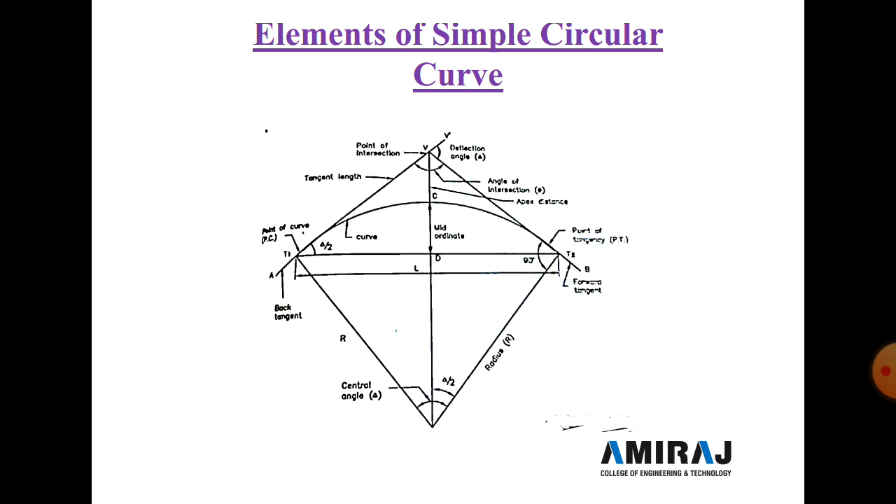Today we start a new topic in chapter number 4, curves, of the subject surveying. So today we start the topic elements of simple circular curve. In the last lecture we discussed the different components or parts and their definitions, and today we discuss the elements of simple circular curve.

So first we start with length of curve. What is length of curve? The total length starting from T1 to C to T2 is known as the length of curve. If the curve is designated by the radius, capital R, the length of the arc is equal to T1 C T2. You already saw T1 C T2 in the figure. This is the total length from the starting point of the curve to the end point of the curve.

So length is equal to R into delta, where delta is in radians. To find the length of the curve we use L is equal to R into delta, and where delta is in degrees, L is equal to R delta pi divided by 180. R delta pi divided by 180 is the total length of the curve, and these two equations we use if the curve is designated by the radius, and second if the curve is designated by the degree of curve.

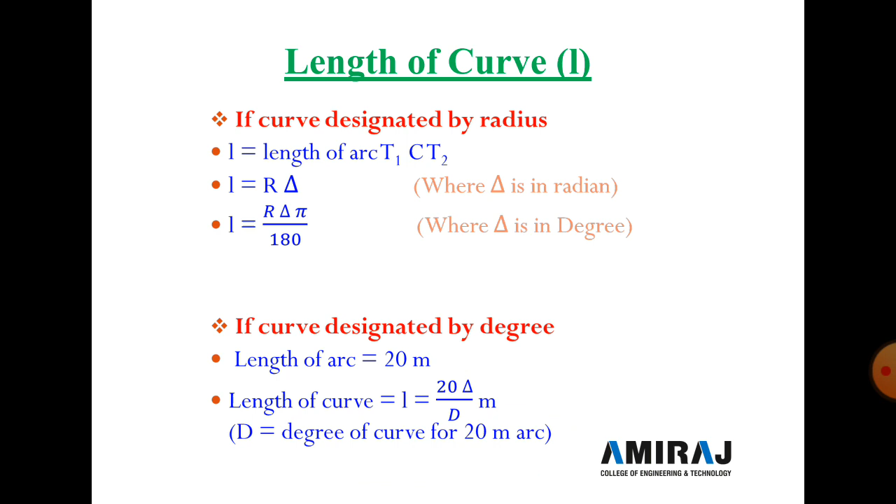Length of the arc is equal to 20 meters. So length of the curve L is equal to 20 delta divided by D, where D is the degree of curvature for a 20 meter arc. These are the final equations for finding the length of the curve.

Next is the tangent length. What is tangent length? Tangent length is the length VT1 and the length VT2. VT1 and VT2 are equal to T, so T is the tangent length. We take the triangle VT1O. Here the central angle, the total angle, is delta, so the half angle is delta by 2.

So we take triangle VT1O. Here tan delta by 2 is equal to VT1 divided by OT1. VT1 is the tangent length T, and T1O is the radius of the curve, equal to R. Clear? So T is equal to R tan delta by 2, where T is the tangent length and R is the radius.

Next, the equation for finding the length of the chord. The length of the chord is the total length from the starting point to the end point. This L is the length of the chord, L is equal to T1 to T2. In other words, 2 times T1D or T2D. Clear? To find this length we take the triangle T1DO.

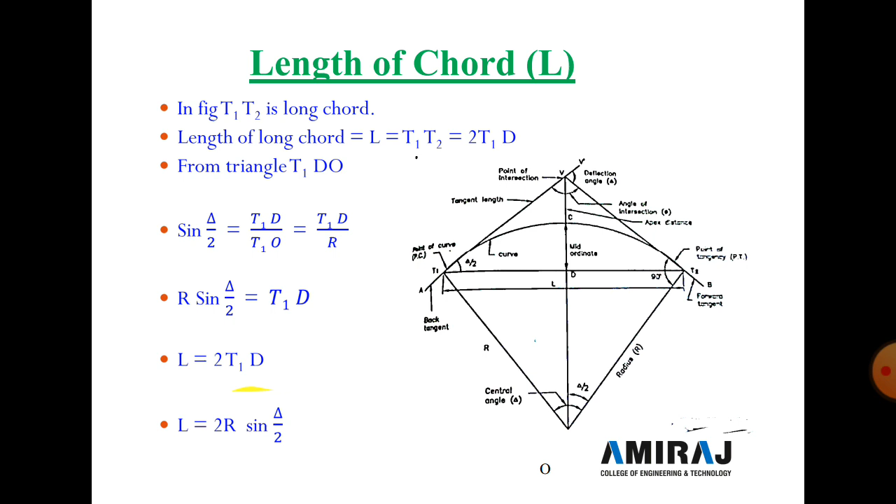Next equation: find the external distance E. The external distance is the distance VC. This distance from V to point C is the external distance. So external distance E is equal to VC, which is equal to OV minus OC.

So we take the triangle VT1O, which we discussed in the last slide. Here cos delta by 2 is equal to OT1 divided by OV. Clear? We find OV, and OT1 is already known, it is the radius R. So OV is equal to R divided by cos delta by 2, so OV is equal to R sec delta by 2.

Now E is VC, which is equal to OV minus OC. OV we found as R sec delta by 2, and OC is the value of R. OC is the radius of the curvature, because this is a curve and R is the radius of the curvature. So R sec delta by 2 minus R; R is common, so R (sec delta by 2 minus 1). This is the value of the external distance E, the equation for finding the value of E.

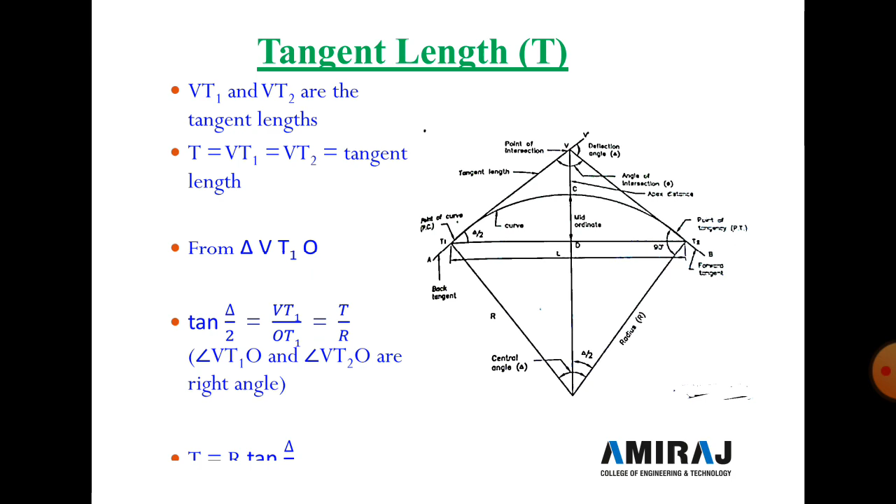in this equation. So M is equal to OC minus OD. OC is already known, the radius R, and OD we calculated as R cos delta by 2. Now in both values R is common. So R (1 minus cos delta by 2) is the mid ordinate equation.

Now another topic is setting out of a simple circular curve. First of all, the tangent points should be located on the ground very accurately, because when we select an area where curvature is required, we set up the instrument at a point where all the points are easily visible. Now, location of the tangent point. First the surveyor studies the work plan, then after knowing the offsets of certain points on both tangents, marks them on the ground.

Now both tangents AV and BV intersect at point V, known as the intersection point, as we already saw in the figure. Set up the theodolite at point V and measure the angle AVB. This angle is the angle of intersection, phi. Now the deflection angle delta is 180 degrees minus phi. So the deflection angle is 180 degrees minus the angle of intersection phi.

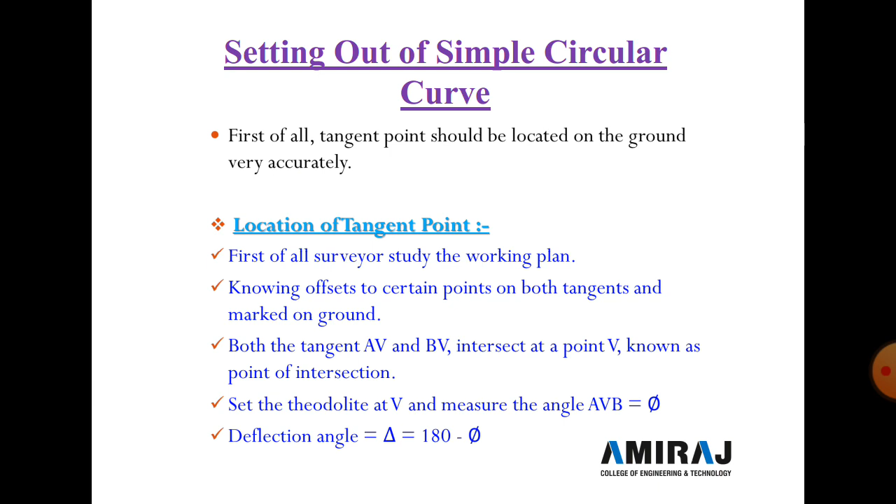Now calculate the tangent length. We already found the equation in the last slide: tangent length T is equal to R tan delta by 2. Now select point T1 on line AV at a distance T from V, and similarly select point T2 on line BV at a distance T from V. These two points, T1 and T2, are marked on the ground.

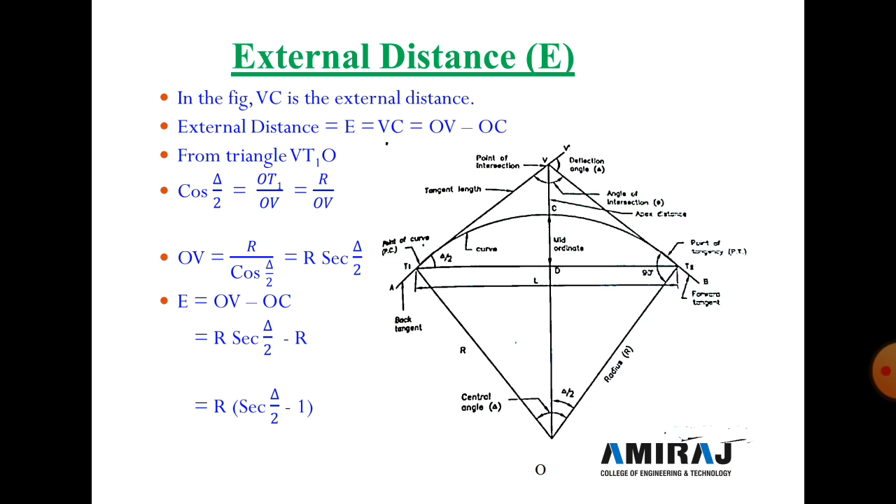Now chainage of the tangent point. The distance of any point from the beginning of the chain line is known as the chainage of that point. Point A is the starting point of the chain, and the chainages of V, B and D are measured from point A. So the starting point is A and the end point is B, and the chainages of points A, V and B are marked on the ground.

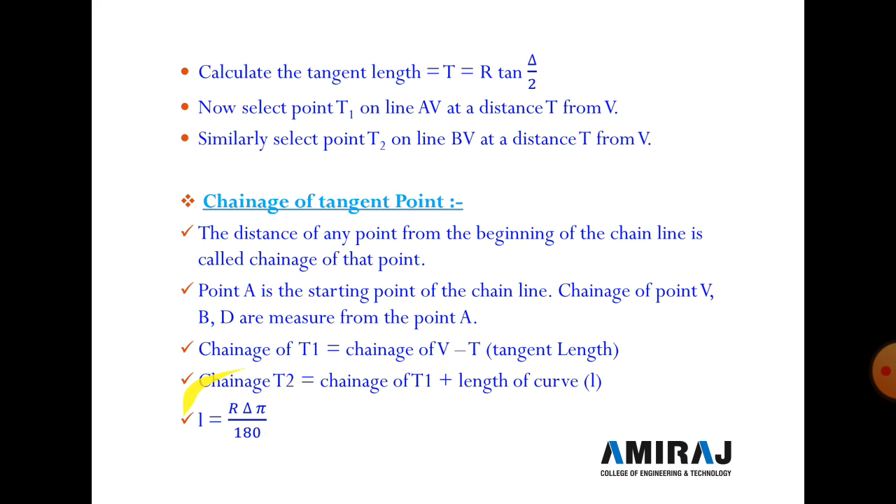Now chainage of T1 is the chainage of V minus tangent length T, and chainage of T2 is equal to chainage of T1 plus length of the curve L. Here L is equal to R delta pi divided by 180. We already found this equation in the last slide: L is equal to R delta pi by 180.

Now another topic: normal chord and subchord. On the alignment of the curve, pegs are driven into the ground at certain intervals. The distance between two pegs is normally kept equal to 20 meters, and this distance is known as the peg interval. If the pegs are driven at 20 meter intervals, the peg stations are called main peg stations. The chord joining tangent point T1 to the first main peg station is called the first subchord, and all chords joining adjacent peg stations are called full chords or normal chords.

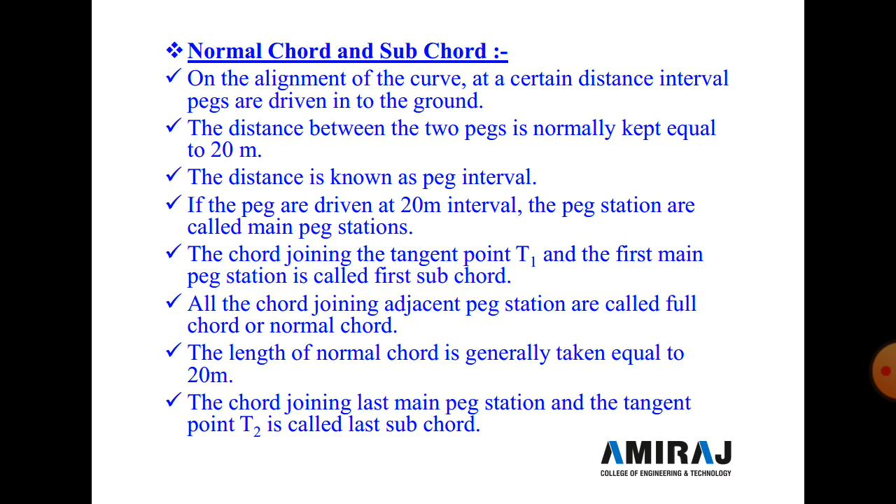So the small chord is a subchord, and the chords joining from start to end are full chords or normal chords. The length of the normal chord is generally taken equal to 20 meters, and the chord joining the last main peg station to tangent point T2 is called the last subchord.

Now next we start the methods of setting out of the simple curve. Here there are two main methods: angular method and linear method. So, methods of setting out of the simple circular curve. First we start with the linear method.

Only chain or tape is required for setting out the curve, and angle measuring instruments are not used in the linear method. Only general linear measurement instruments are used for finding out the length and also for setting out the curve. This method is used where a very high degree of accuracy is not required, because it's a simple linear method and only simple measurement is required.

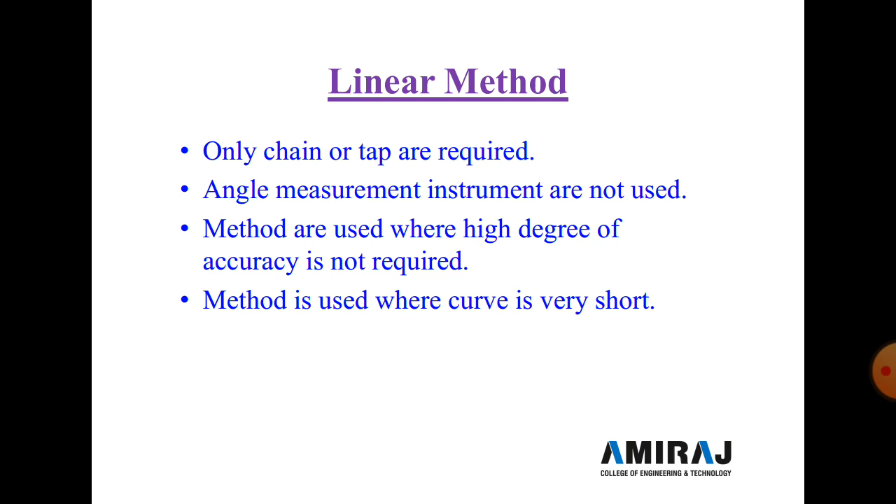So no major accuracy is required, and the method is used where the curve is not very long. The linear method is simple as compared to the angular method. There are four types of linear method: first, by offset or ordinate from the long chord; by successive bisection of arc or chord; by offset from the tangent; and by offset from the chord produced. These are the main four methods. One by one we discuss them.

We start with the first method, by offset or ordinate from the long chord. Here you see the figure. O is the center point of the curve, the starting point is T1 and the end point is T2, V is the intersecting point of the two tangent lines, T1 to T2 is the main chord, and R is the radius of the curve.

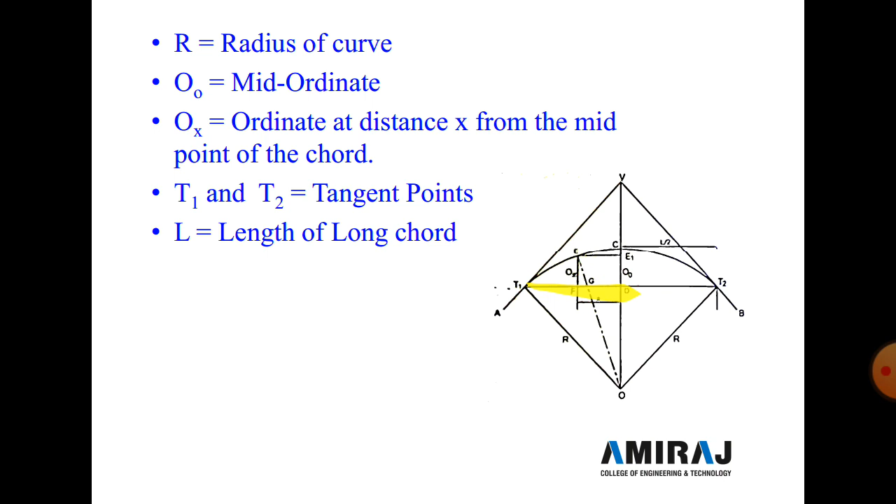R is the radius of the curve, and O0 is the mid ordinate, the distance between D and C, and Ox is the ordinate at distance x from the midpoint of the chord, and T1, T2 are the tangent points. The total length of the chord T1 to T2 is L. Now to obtain the equation for O0, we use the triangle OT1D.

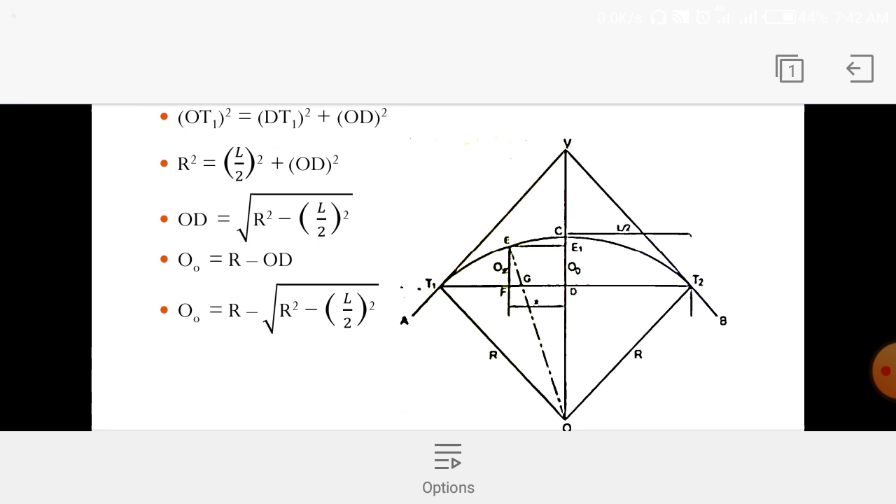So we take this triangle OT1D. We apply the formula OT1 square is equal to DT1 square plus OD square. So R square is equal to (L/2) square plus OD square. Why L/2? Because the total length of the chord T1 to T2 is L, so T1D is L/2. So OD is equal to the square root of R square minus (L/2) square.

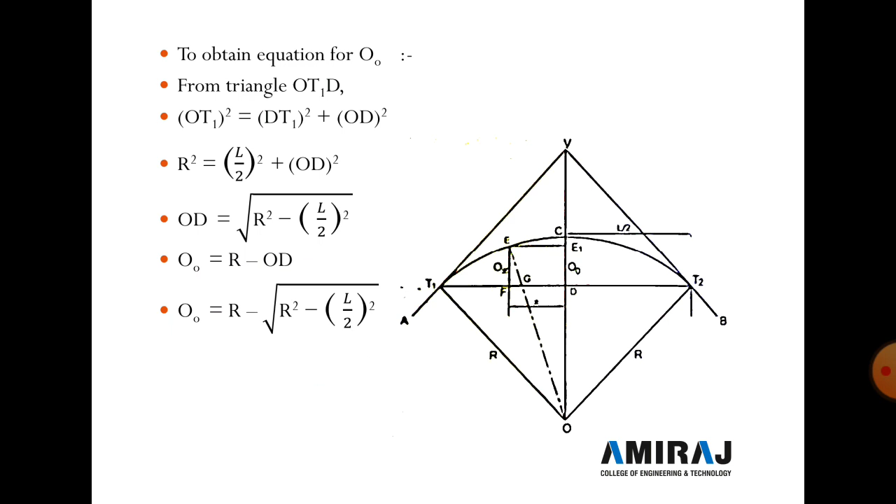Now O0 is R minus OD. So O0 is R minus the square root of R square minus (L/2) square, which we already found. So O0 is the mid ordinate distance.

Now in order to calculate the ordinate Ox at any point E on the curve, the line EE1 equal to x is parallel to the long chord T1T2, and EO cuts the long chord at G. So G is the cutting point on the chord. Now we take a triangle.

Ox is equal to EF, which is equal to E1D. This distance and this distance are the same. So E1D is equal to E1O minus OD. E1O is equal to the square root of OE square minus EE1 square. It's a simple triangle formula, and OD is equal to R minus O0.

Now OE is the radius of the curve, EE1 is the x distance already known, and R minus O0 is known. So we find Ox from this equation: Ox is equal to the square root of R square minus x square, minus (R minus O0).

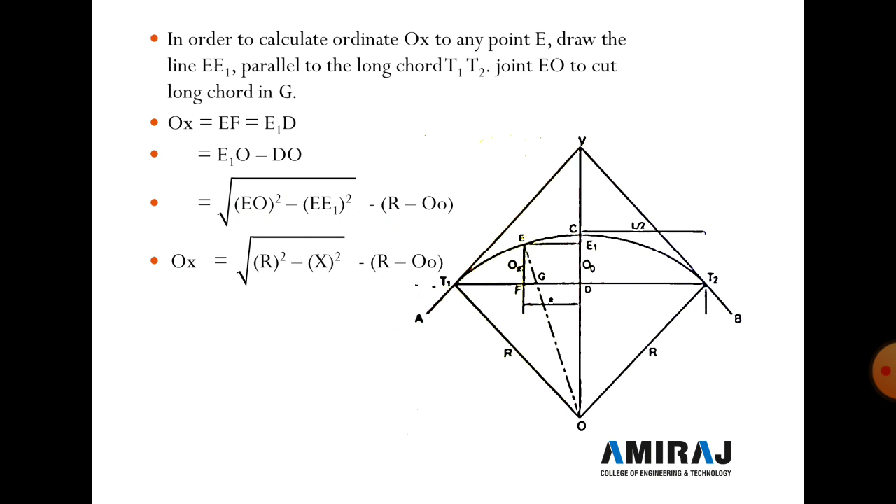Now the second method is successive bisection of arc or chord. Here the starting point is T1 and the end point is T2. Bisect the long chord at D, and erect DC perpendicular at D equal to the mid ordinate M, and the mid ordinate M is equal to CD. We already found the equation in the last slide.

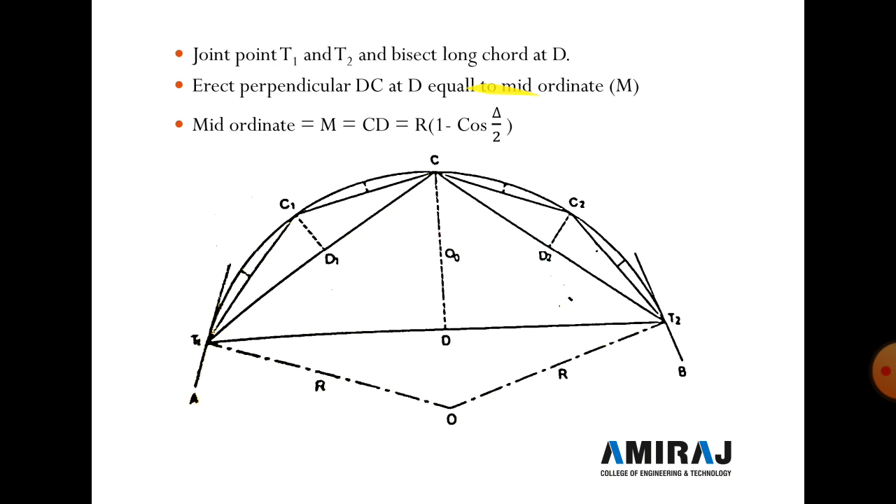CD is equal to R(1 minus cos delta/2). So CD, CD1 or CD2, all the values are R(1 minus cos delta/2). Now O0 is equal to R minus the square root of R square minus (L/2) square. Then join T1C and T2C.

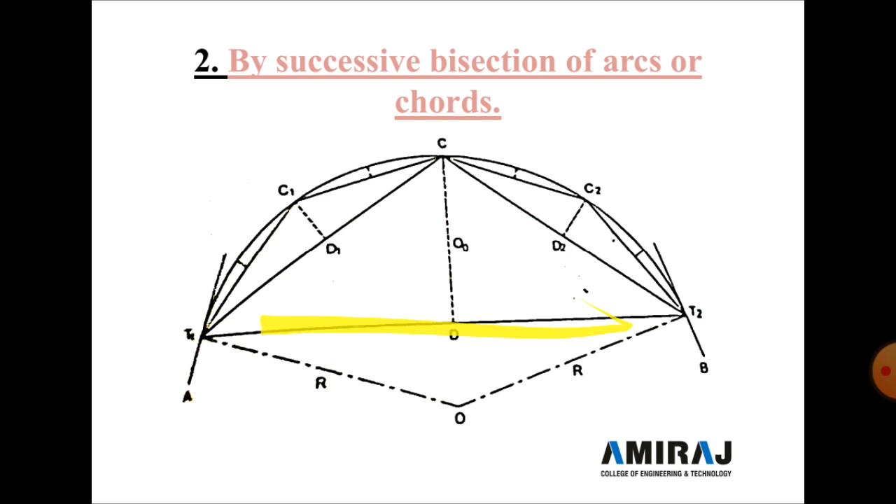Then after bisecting, the center points D1 and D2 are marked on the ground. Then at D1 and D2, set out the offsets C1D1 and C2D2. C1D1 and C2D2 both have the same value: 1 minus cos delta by 4. Clear? Because here the large mid ordinate is 1 minus cos delta by 2. Now here the half part is 1 minus cos delta by 4.

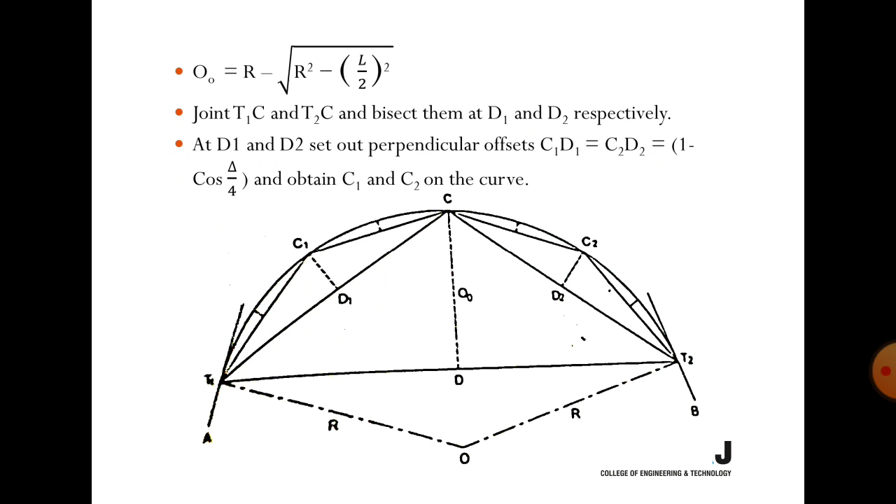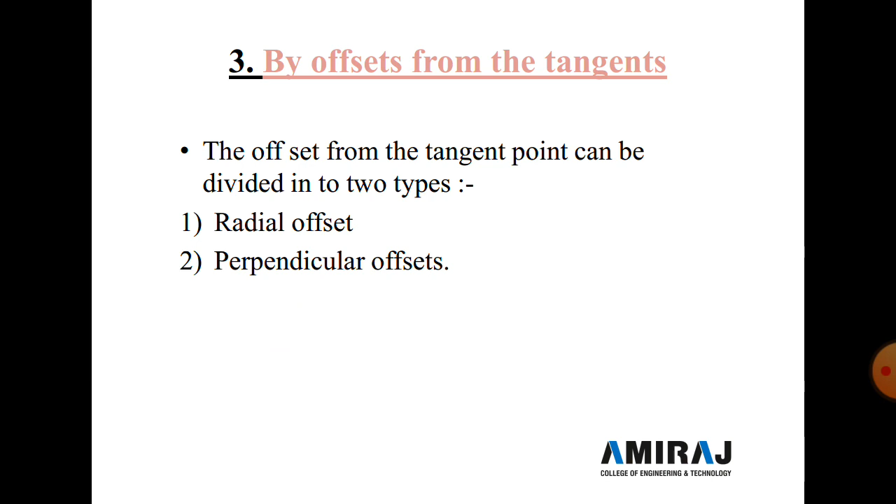Clear? Now another is 1 minus cos; if we halve this point, it's 1 minus cos delta by 8. Now the third method is by offsets from the tangents. The offsets from the tangent can be divided into two types: first is a radial offset and second is a perpendicular offset.

So here in a radial offset, OX, this distance, is the radial offset DE, at any distance x from T1 along the tangent. So from the starting point at x distance we find point D. So T1D is equal to small x. From the triangle T1DO, OD square is equal to OT1 square plus DT1 square. Clear? So OD is equal to R plus OX.

R plus OX square, and OT1 is the radius of the curve, so it's simply R square, and DT1 is small x square. So R plus OX is the under root of R square plus x square. So OX is equal to under root of R square plus x square minus R. So this is the radial offset equation: OX equals under root of R square plus x square minus R. Now next,

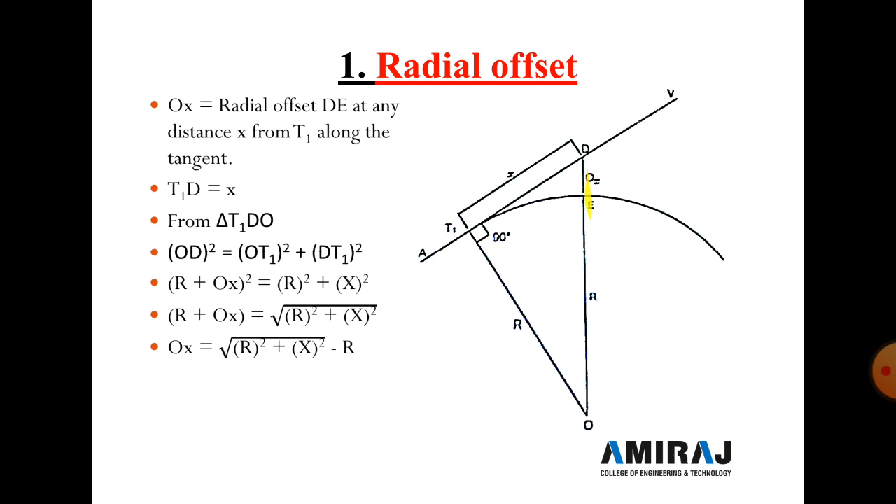perpendicular offset. In a radial offset, the offset is not perpendicular to the tangent, but in a perpendicular offset the offset is exactly perpendicular to the tangent. Now OX is the offset perpendicular to the tangent, DE is the OX value, and T1D is the x value. Now from the triangle EE1O, we apply OE square is equal to OE1 square plus EE1 square.

OE is the value R. Then OE1 is OT1 minus T1E1. Clear? Here T1E1 is the same value as DE, which is OX, and OE is the radius of the curve, and EE1 is the value of x, since T1D is equal to EE1. So R minus OX square is equal to R square minus x square.

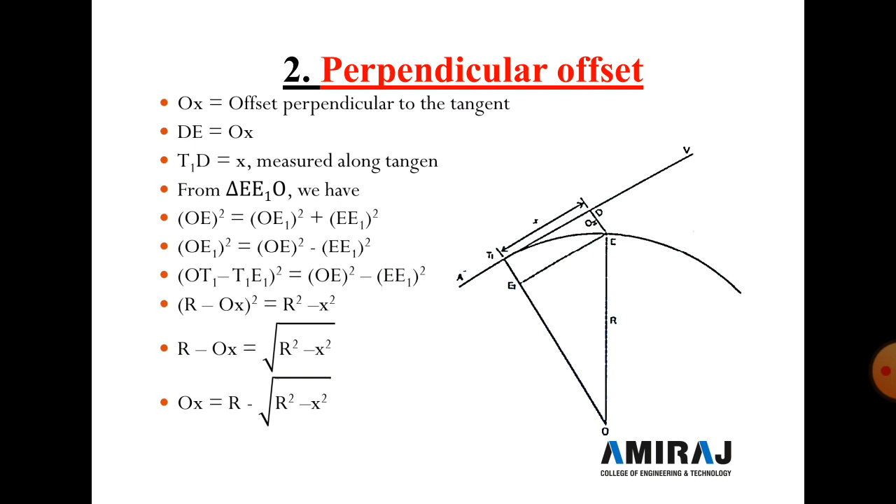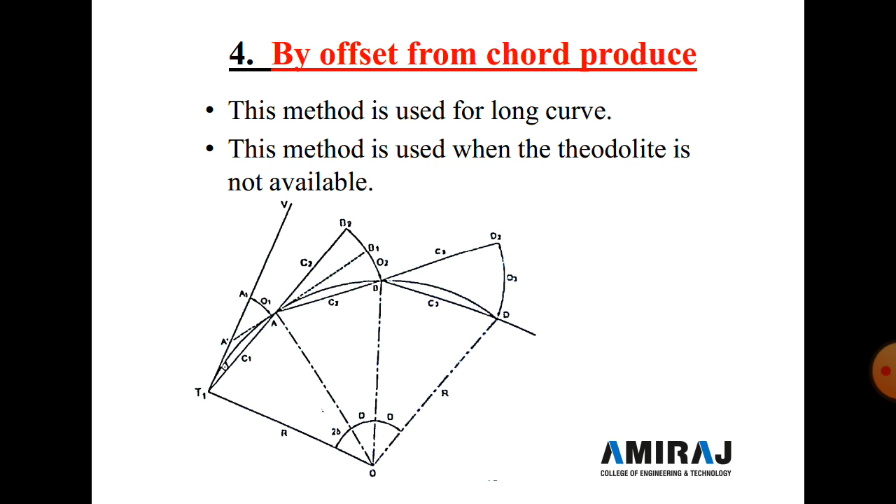So R minus OX is equal to under root of R square minus x square. So OX is equal to R minus under root of R square minus x square. This is the perpendicular offset equation. Now the fourth and last method: by offsets from the chord produced. This method is used for long curves and when a theodolite is not available.

In this method, first of all T1A, the initial subchord, is equal to C1. AB is a normal chord C2. Then BD is a normal chord C3. T1V is the back tangent, and angle A1T1A is the deflection angle.

Now A1A, O1, is the first offset. Similarly B2B, O2, is the second offset, and D2D is the third offset. Now arc A1A, equal to O1, is equal to T1A delta. T1V is a tangent to the circle at T1, and angle T1OA is 2 delta. Clear? So T1A is equal to R times 2 delta.

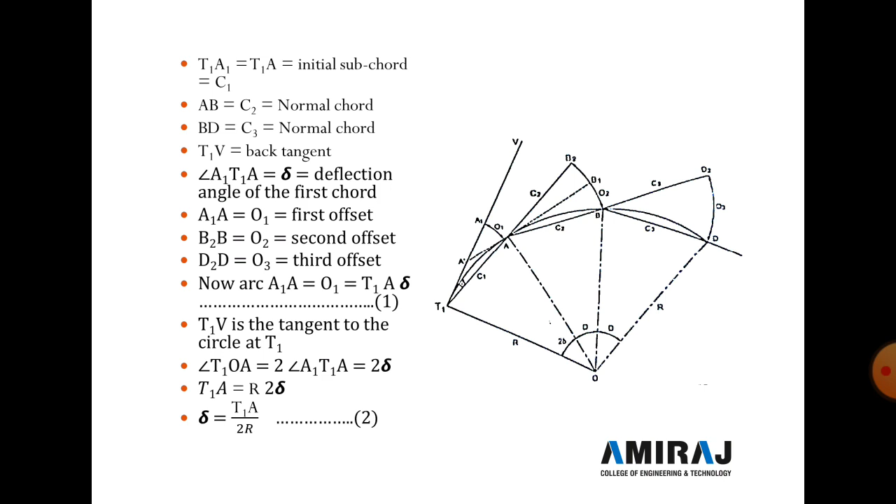So the angle delta is equal to T1A divided by 2R. This is equation number 2. Now substituting delta in equation number 1: O1 is equal to T1A delta, and delta is T1A divided by 2R, as found in the last slide. So O1 is T1A whole square divided by 2R. T1A is C1, so C1 square divided by 2R. This is O1, the ordinate.

The next topic is the angular method, which we will discuss in our next lecture. So here we complete our topic.